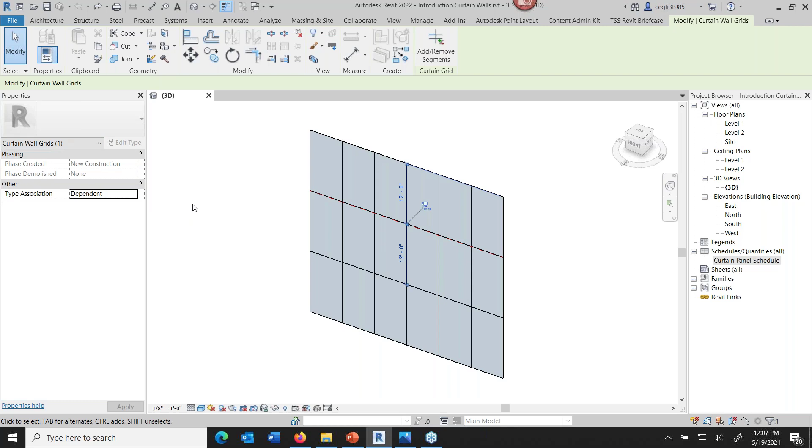If you select on the outside, you can see here that it's a wall, and I'm just using the out-of-the-box exterior glazing here. Another element of it is the grid, so I'm selecting on these dashed lines that show up both horizontally and vertically here. You can see there's no edit type with regard to that, so it's pretty straightforward, but it has its own magical elements, which I'll show you a little bit, even though that seems pretty simple.

I'm just going to hover over the center here and tap the tab key a couple of times, and then left click to select the curtain panel. In this case, out of the box anyway, I used the architectural template to draw this one. You can see here that it's using a glazed panel, but if you go to the drop down, you can pick other panels, or you can pick a wall to drop into this as well.

What I've used before, like on a butt glazed corner condition, where I wasn't getting the join to come the way I liked with these panels, I made a new wall and made it glass and made it the same thickness as the other panels in here, and then replaced the panels that were near along the edge of the corner that came together.

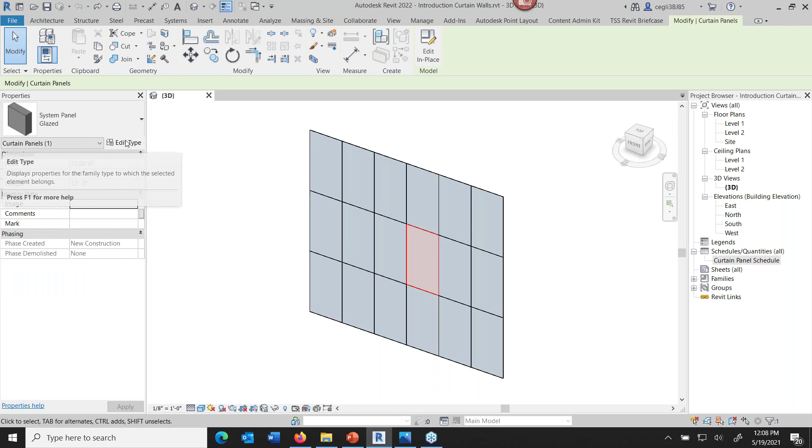Okay, so you're seeing some instance parameters that are associated with the panel here. If you go to edit type on this and drill under the hood, the type parameters revolve around offset, finish material, and then analytical properties associated with the thickness, that kind of thing. If you go to the curtain wall itself, there are quite a few more instance parameters in the property palette off here to the left. I'll just make that a little bit wider for you. And then if I click on edit type,

more controls. So here's a lot of rules going on under the hood as far as the layout and the like. This one's set right now for a fixed distance for the vertical and the horizontal grid. But if you pick inside that cell and look underneath the hood, you could put in a fixed number. This is 6 feet. If I wanted it 4 foot wide, 9 foot wide, or something like that, you could do the fixed number, and it would change the spacing there. Same thing with the horizontal.

I'm going to mostly just deal with analyzing the vertical grid, so we'll keep an eye on that one today because it's the same going the other direction. It's just redundant to do that here. So okay, depending on your design intent, you can decide for yourself where you want that to be.

Now the grids that we're seeing here, you can actually drop in more if you want. The rules said to place it, what was it, 6 by 12 or something like that. But I can come up here and select curtain grid on the architecture panel, and as I move my cursor around, you see how a grid is following my cursor in the horizontal direction. And if I track along one of the horizontal ones, it goes to drop in a vertical grid. So now I've got some more grids added in if I felt like it.

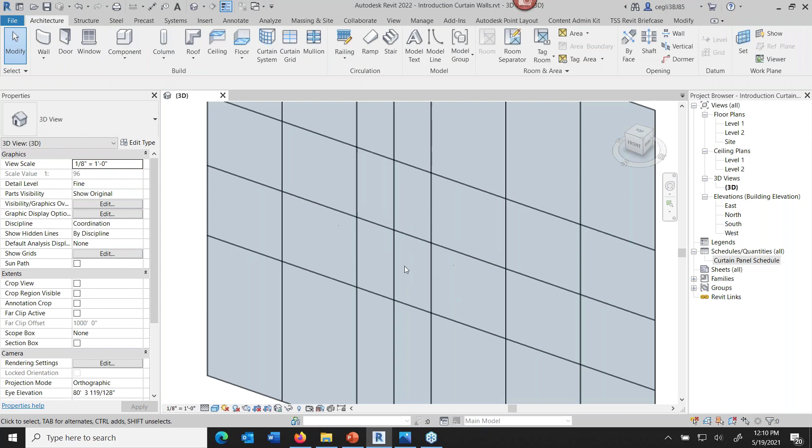Also, you should see that I can pick and move them around too, by the way. I can pick them up and slide them from place to place if I want, like that. One kind of magical thing about the panels is if I tab a few times to select, you can see that it subdivided that original panel when I dropped in the grid. Okay, so let me go ahead and back that up just a little bit here.

Get rid of those. Okay, now with regard to the grids that are in here, if you didn't want one where it landed according to the rules, you can unpin it. So you select it and unpin it, and then from there you can move it as well. So I'm just sliding it up right now, and you can see here, as I showed earlier, the panels have resized to accommodate that.

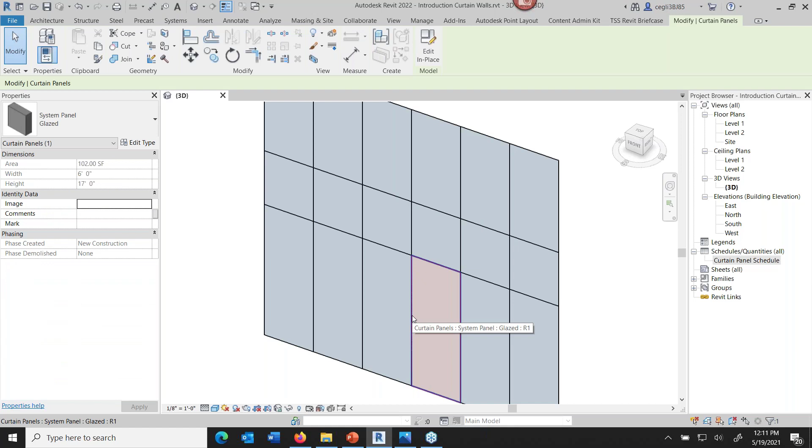Okay, with a zero thickness between panels at this time without the mullion. Now, do be aware that later on, if you say, hey, I think I'll go ahead and pin this where it is, it actually looks back at the rules again, the ones in the curtain wall itself. It looks at a type on the curtain wall, and fixed distance says, oh, here's where I should be.

Right, so then it moves back again. So if you do need to move them around, chances are you're going to leave it unpinned for the life of the project. Okay, so I might have missed it, but I didn't.

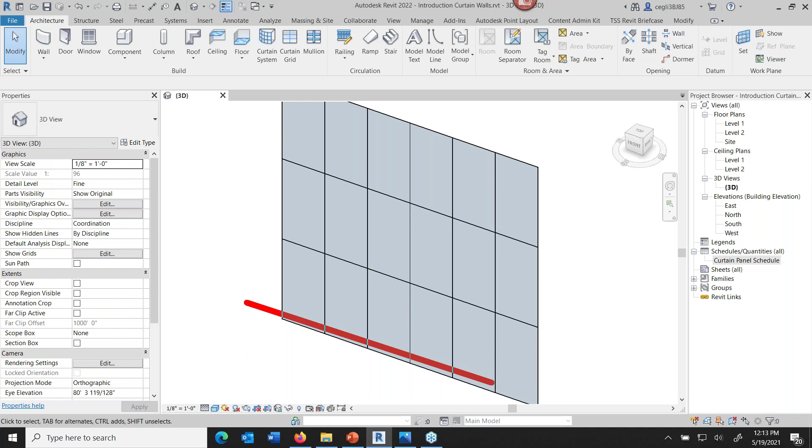Now I drew it from this direction, across this way as I was drawing. So if I expand it with the grips down here a little bit, let me just move it a bit. You can see it's starting to add in panels on that end, not the other end. Same thing here, so the beginning, at least for me, was over here in this corner. So consequently, they'll come back in on top and to the side there, okay? So a couple undos there to move that back again.

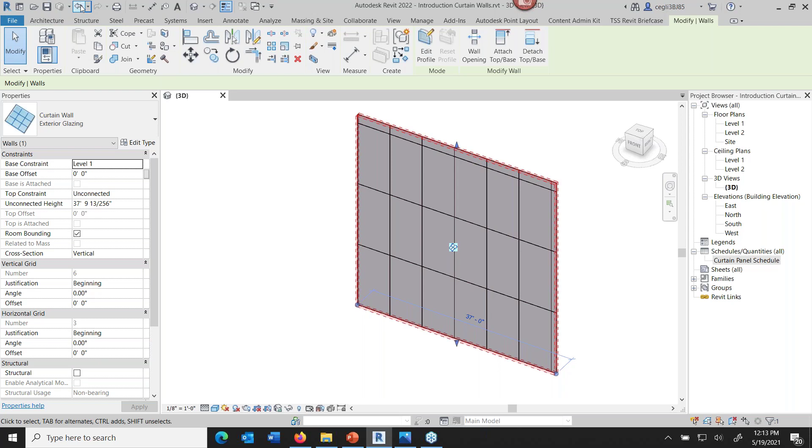Okay, now if you're tracking the dimensions of the panels, I wanted to get into that a little bit, because that's kind of a frustration for me.

And Lana can attest to this. She was chatting with us a little bit earlier this morning about how she did a presentation on Assemble. You all know Lana, she was pretty darn sold on it, so you might want to chat with her a little later on about her experience there, because I can't cover everything here. We could probably do this for easily a day, but we've only got like 45, 50 minutes.

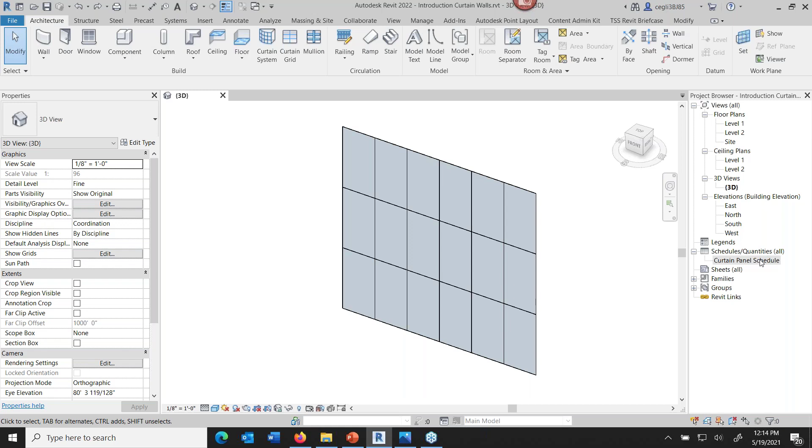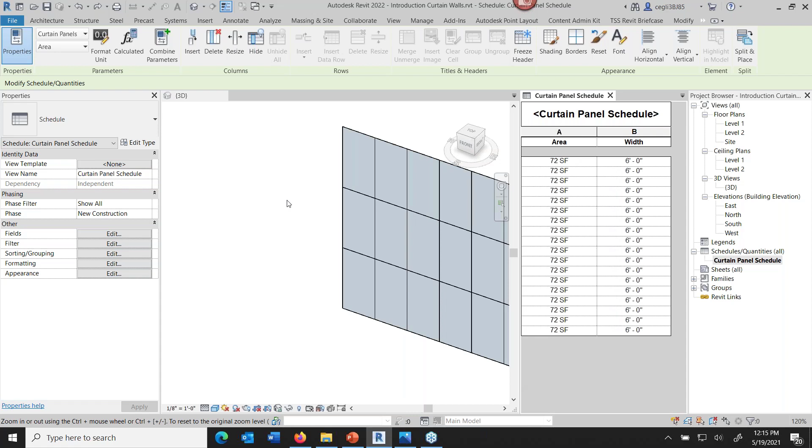So with that, I made a panel schedule here, and let me put them side by side, and then maybe zoom this in a little bit so you can see. So Control plus, by the way, is how you zoom in a schedule. And as I pull that over, you can see right now, if I can get a hold of it here, geez, there we go, you can see right now I have a 36 by 36 wall that I drew.

So all the widths here are 6 feet, 6 feet, because like I said, nothing is being taken up by the grid itself, it's zero thickness, right?

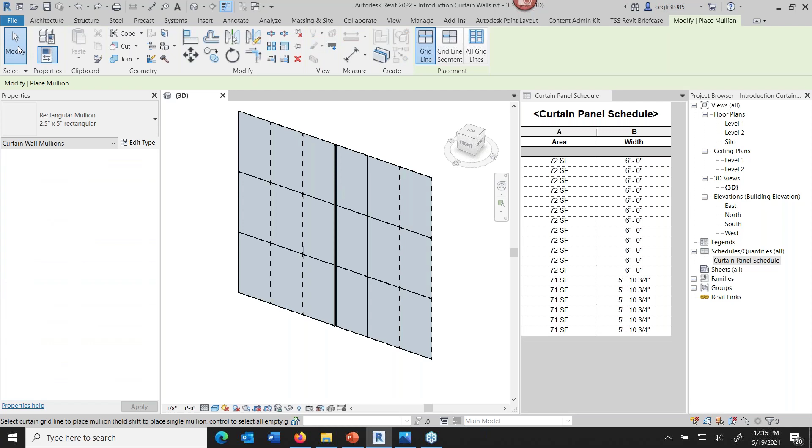So putting in a mullion though, if I hit on mullion and say drop one in right here in the middle, you can see that—well, here actually I should have pointed this out—according to the name anyway, it says that the profile is 2.5 inches and then by 5, right? And so you can see that the panels on either side here, like these guys, if I just pick in the row that'll highlight out there, you can see that it's actually taken away some from the panel itself just to have a mullion in there.

So we're going to have to make some adjustments then if you want to really have 6-foot glazing in there and not a bunch of weird sizes.

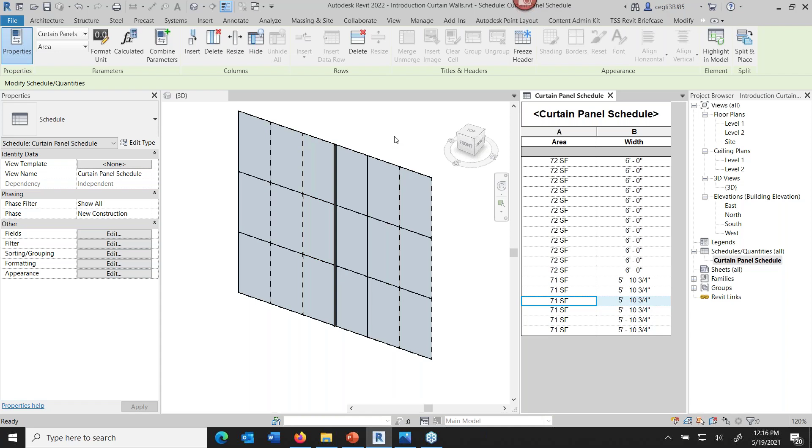There's some things we might have to do. On the wall itself, if I go to edit type, there's an option to adjust for mullion size. I want a fixed distance, 6 foot, adjust for mullion size. I toggle it on and click OK, and nothing happens. Look over here - as far as I'm concerned, maybe I'm missing the boat here or something.

That didn't work worth a hoot. So anyway, maybe there was some other reason for it. Actually, okay, so they actually say 'when possible' it will do that. So I don't know, maybe that's part of what it is.

I might have to change the spacing on this, right? Let's go back to edit type and say spacing. We're 2.5 inches short on this, so 2.5 inches there. I'll just go ahead and place them all on the interior type to use that one, so not worry about the ends right now - that's a whole nother ball of wax. I'm just giving a little extra there, and then I click OK.

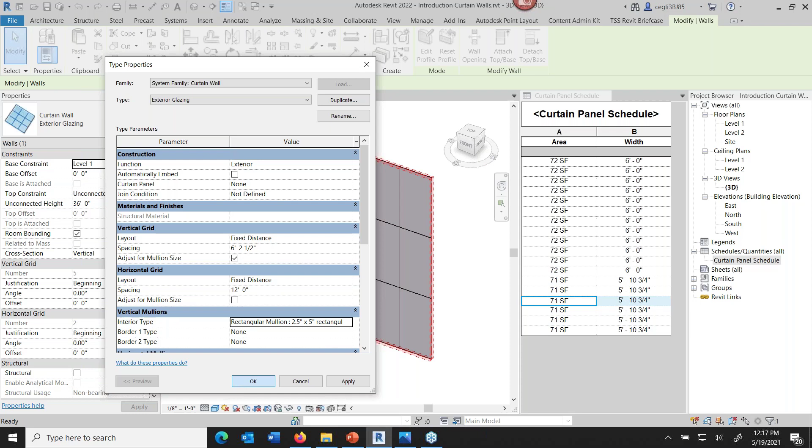You can see here that some of them have gone back to be 6 foot, right? The ones around the middle that we were concerned with, but now on the end I'm short. So a little bit of quick math here, pick on this - I'm actually going to have to extend the wall out, like 37, and I guess that'd be a half inch, about right there.

Ta-da! Indeed, now they're all 6 feet. So if the mullion is going to take up part of your panel width, you got to adjust that, or just plain decide you're going to have narrower panels on it, okay? Now we got that. Let me go ahead and close out of this.

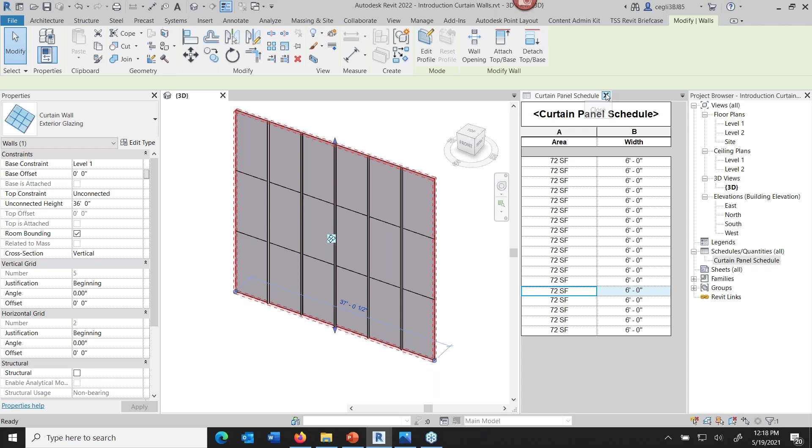What I wanted to do next with this is work on these mullions a little bit and take a closer look at it. Let me see if I can tab through and select one of these. I'm just going to orbit around a little bit here. So here's the one - this is the out-of-the-box from Autodesk one, the 2.5 by 5 inch rectangular mullion. And it is indeed just grabbing everything it can get its hands on for the width of itself, right?

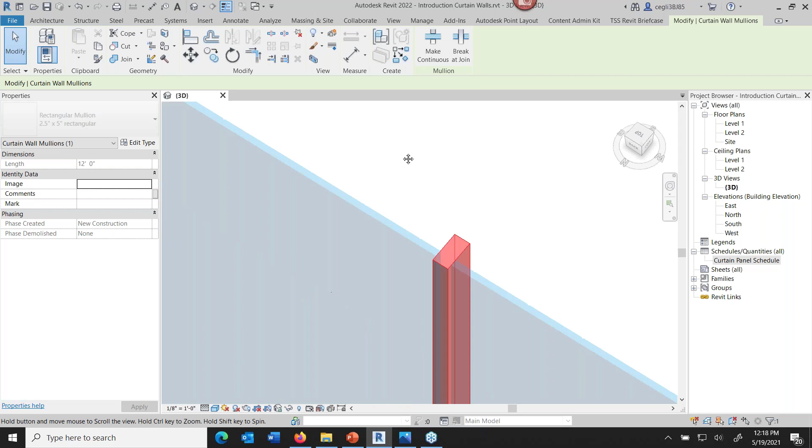But I thought maybe it might be interesting to try this one right here. Let me wait till my screen catches up here a bit. I'd like to get a butt glazed mullion profile working here.

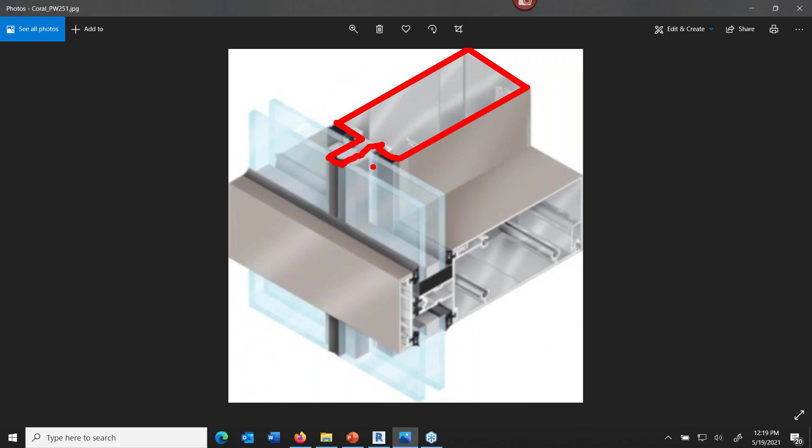Maybe I can sketch over the top of this a little bit. So right up here would be my shape, like that, because there's a profile underneath the hood that drives this. Now I'm getting a little crude with my drawing, but I'm going to want something that looks like this to accomplish this, so that the glazing goes past the mullion edges, and the bulk of the mullion is on the inside of the building. Makes a pretty clean look, which is what this manufacturer is attempting to do, and I'd like to mimic that if I could.

So let's start with - I'm not going to take the time to draw one up, but indeed I've done one for us already. Let me go ahead and call up the profile that I'm going to use here for the next step. So here's what it looks like when you get into the mullion.

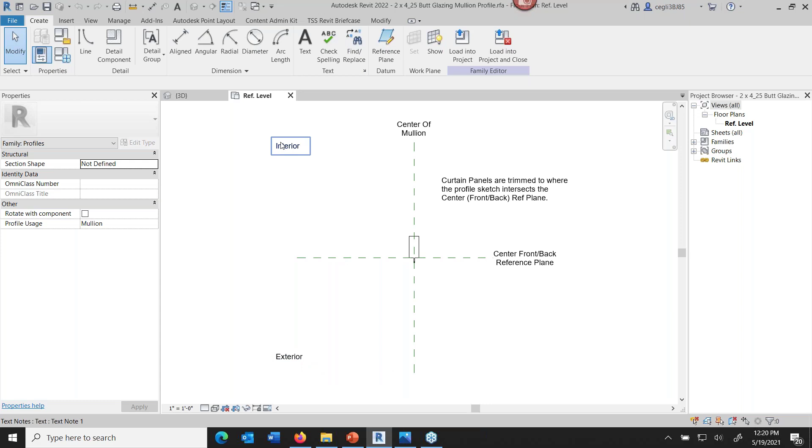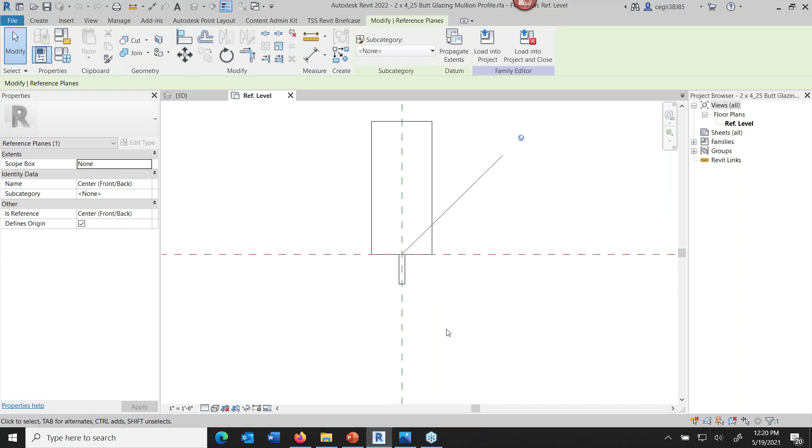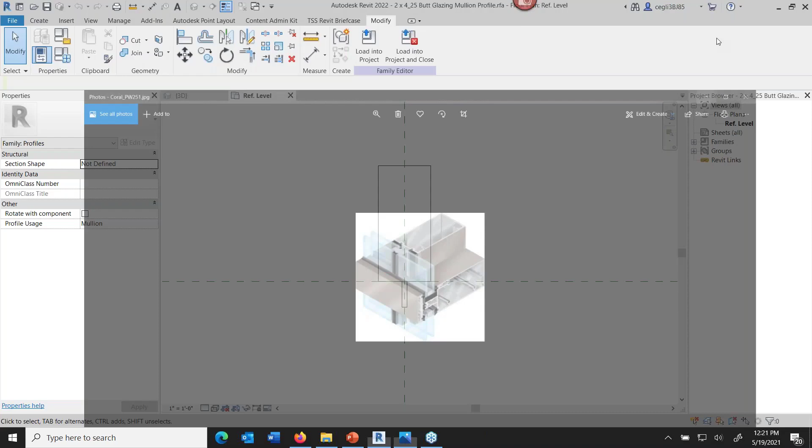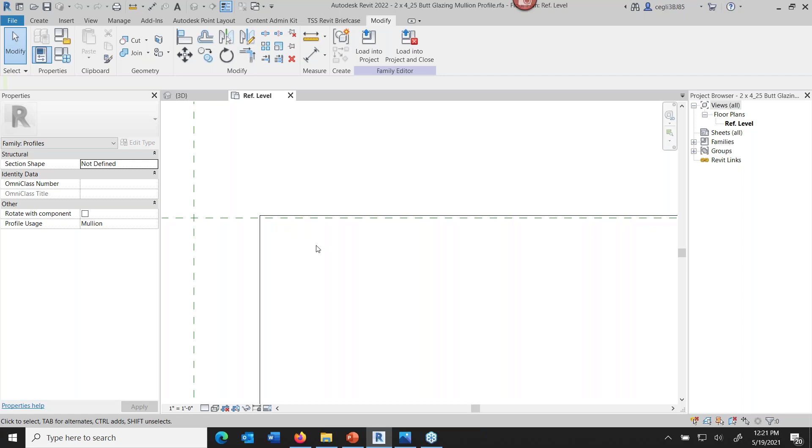So for me to achieve something closer to what we were looking at in this photo, I'm going to have just a little nubbin stick out that, according to the manufacturer, was 3/16 of an inch. So I made the profile lines 3/16 of an inch here. And then here's the part that I had to do - let me get in closer so you can see. I stayed off that green line by the minimum allowed by Revit, which is 1/256 of an inch. I pushed that back in the profile like that, so it didn't intersect it, because if the line comes down here and here, for example, that's how far the glazing will back off.

Okay, so I want to get it in there fairly far. So I'm just going to turn around and load into this project and close it.

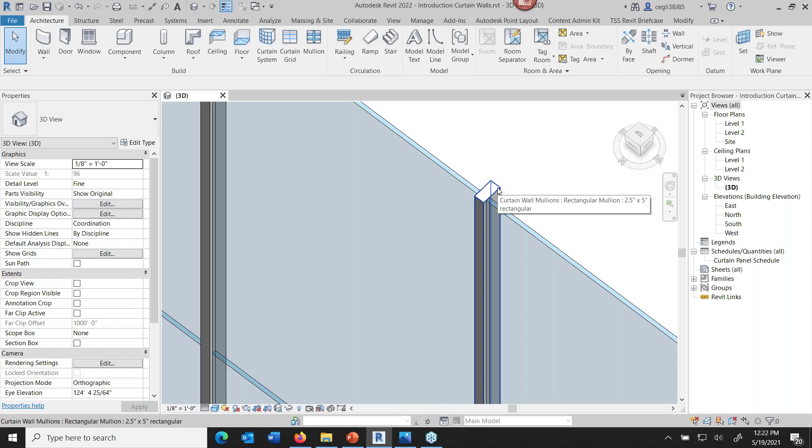Now the mullion itself, if I click on one of these, this is the rectangular mullion, 2.5 rectangle, blah blah blah. I'm going to go to edit type on it, and this will affect all of them I've already put in here. I'm just going to overwrite this one. Normally I'd probably choose one that I'm not using. Well, I'm not going to use this one, so I'll just rename it, and maybe call it glazing mullion, something like that.

And then this part right here is the profile that's being used, which is the default, actually the 2.5 by 5. And here's the one I just loaded in, the 2 by 4.25, blah blah blah, that I made. And I already know I'm going to have to back it off just a little bit.

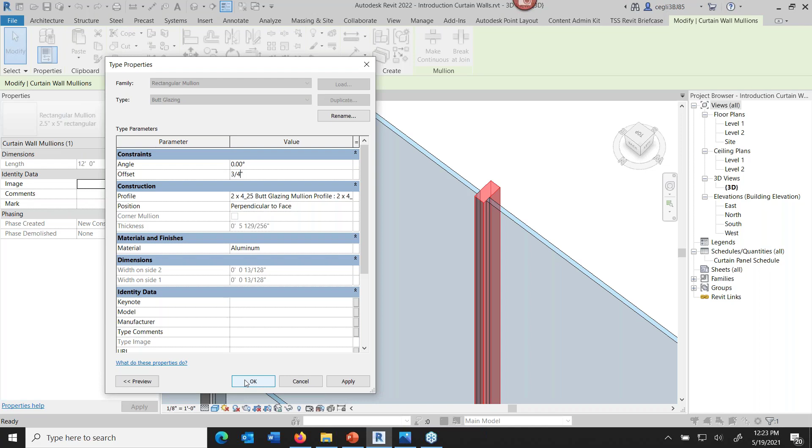You have to adjust how far you want it in either location here. There's a couple places to do that, but I know I'm off by 3/4 of an inch here, so I'm going to push it forward a little bit so it butts up against the glass. I had to tweak around that to figure out what that number was, nothing magical there. Click OK, and it'll go through and substitute all of these. You can see they got substituted out for the new one that, at least I consider, to be improved.

Okay, so that's how we did that. And consequently, the glass, it's not going to be 6 feet now. There's 3/4, or 3/16 of an inch off or something like that now. But you already know, as I showed a little bit earlier, how you can adjust that.

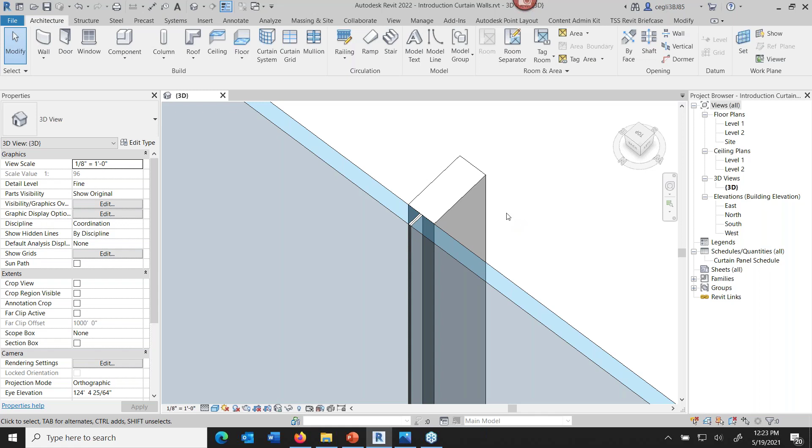With regard to these panels, let's move on to those. These panels we're looking at are glass, right, or glazing anyway, virtual glass. They don't have to be that. As I was saying earlier, I could make this brick if I wanted to, just come up here and say be brick instead, and it'll put brick in there.

But this is another one of these that if you select the wall and hit edit type, you can see that this is a system family. Out of the 3 different family kinds in Revit, which are system families, loadable families, and in-place families, system families are the ones created by Autodesk and contain magic, as I always say, to do something interesting. Drop in a door, the wall opens to receive the door. You slide the door down the wall, and the wall heals itself and opens up in a new location to receive the door, stuff like that.

So there's no edit family button up here on something that's a system family, but it's a play between loadable families and system families. And the profile that we saw a little bit earlier was used there.

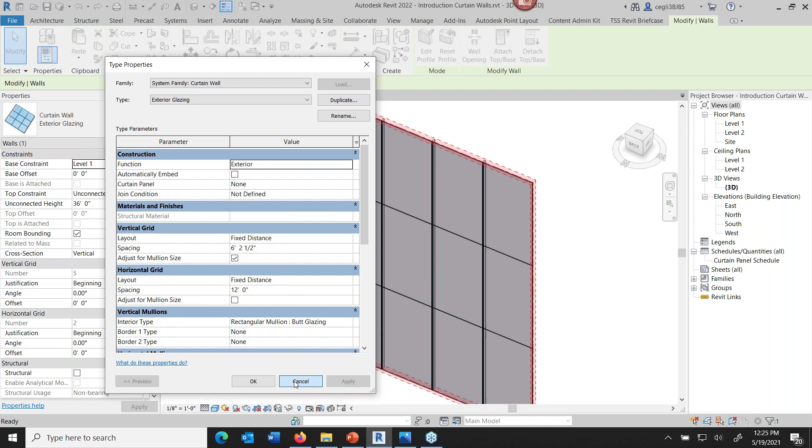We can actually decide what we'd like to be going in for the panels too. So for example, let me open up a sample file that I got from custom—this is from an older Mastering Revit Architecture book, I don't know if they still have these days. The book is called Mastering Revit, 2022 or whatever, probably by now. It was Vandezande, Krygiel, and Read who wrote this one back then, and I thought it was a good example of different kinds of panels that could be in here.

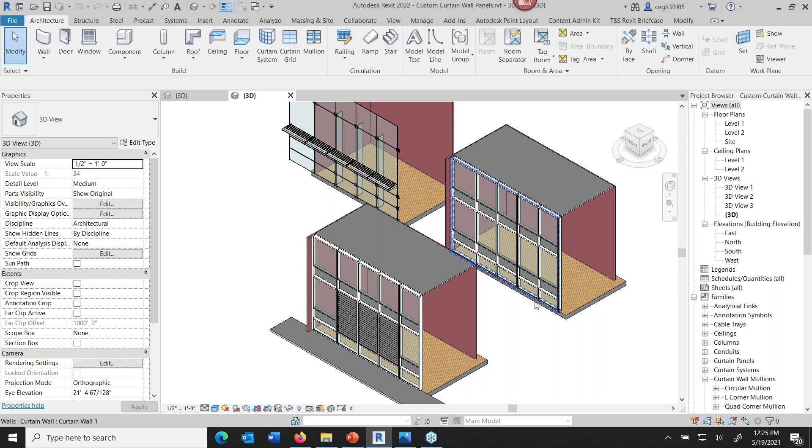Like if I tap to this one—let me see if I can get it—let's see that one. So yeah, here we go, glazed panel with spider is on that one. And then up here, I think this is a different one: yeah, glazed panel with spandrel. So you can swap these out.

What I'm talking about—I won't take the time to open this one up in the family editor, but here, do like that. You can see the edit family button is up here.

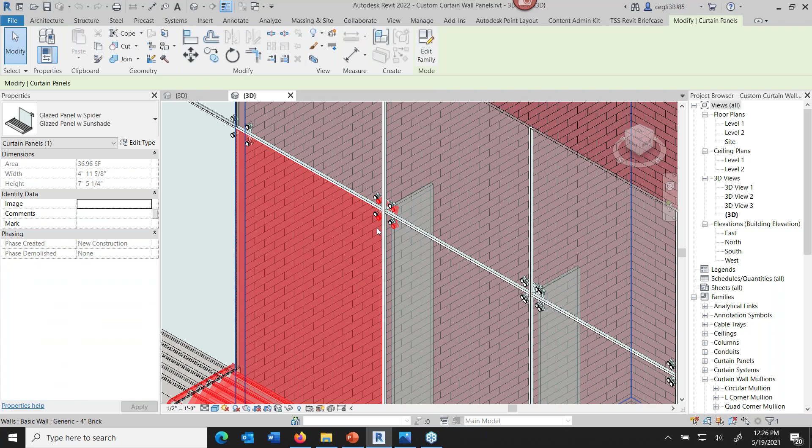In this case, they did a nested family, so they nested the spider in with the other panel here in the family editor. And I wanted to work a little bit with the louvers on this to show you how that would go into play here. So let me go ahead and open up a family that is the louvers.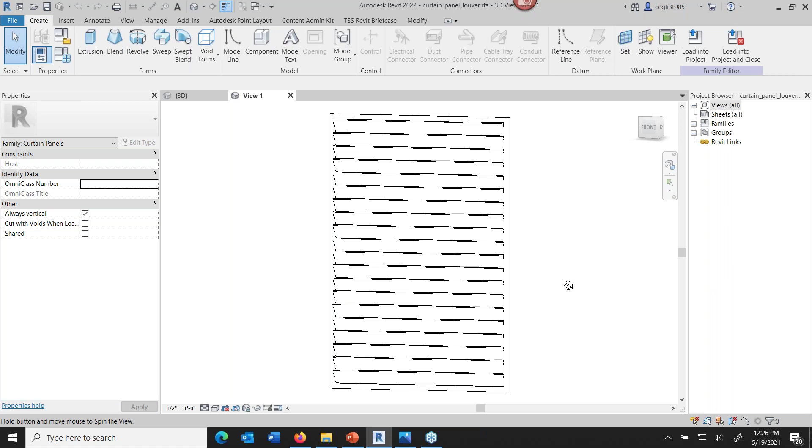By the way, I'm working in Revit 2022, which if you're watching this 3 years from now on YouTube or something, this is our current version that we have right now. Everything I'm doing here so far you could do in 2019 or whatever you want. There's nothing that has changed with regard to this. I'll show you one thing that's new in 2022 that can help you when it comes to curtain walls. So here's a louver family.

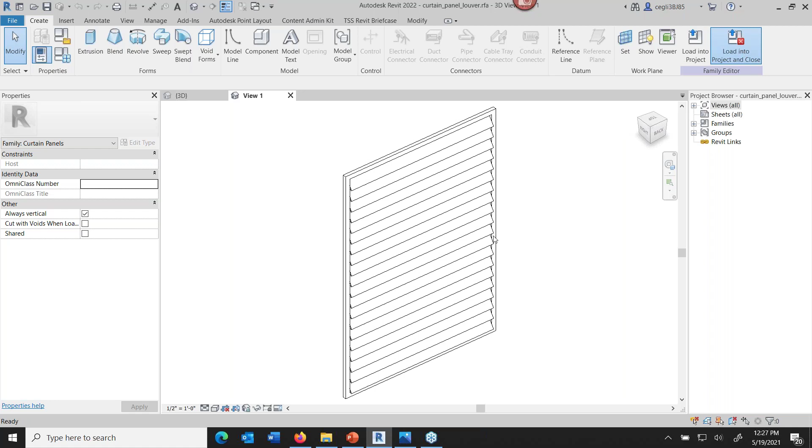I'm going to go ahead and load that one back into my project here and close out of that. So now that one should be available to me. If I select one of the panels, I can swap it out for, in this case, the curtain panel louver that I dropped in. And for that matter, maybe I'll change the number of slats on this down to 16 or something.

So if you have a mechanical level on a high rise, you'd probably go through and swap out all of those panels for louvers if you want to. You've seen that on the side of buildings. You've probably done some yourself that way. Okay. All right, so there's that.

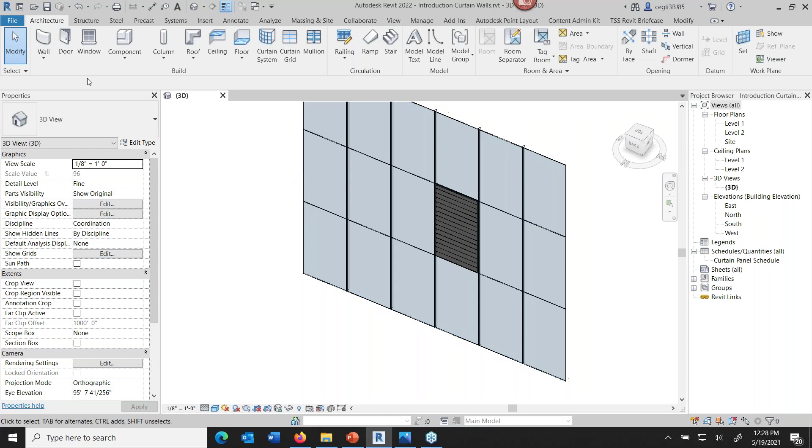Let me try a different set of exercises here. Let me close, and I'm going to open up this one right there. If you're in a position where you need to have a curve, you can see here I've got a curved surface like this that rolls around.

So I go to wall and exterior glazing. I'm going to use the pick lines tool to make this easy on myself here, and go from here to there to there. So here's 3 separate ones that I just created. And maybe I'll go to the 3D view here.

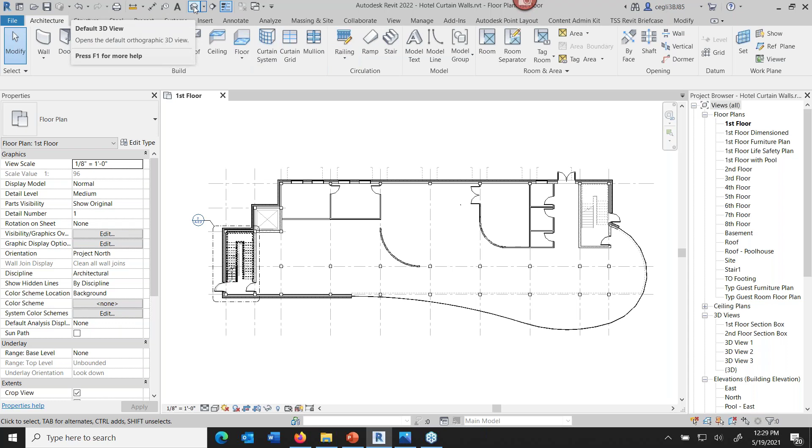Here, I'll just go up to the doghouse up here. It's probably supposed to be a home, but it looks like a doghouse to me anyway. So I'm going up to the doghouse to take a look at what we've drawn.

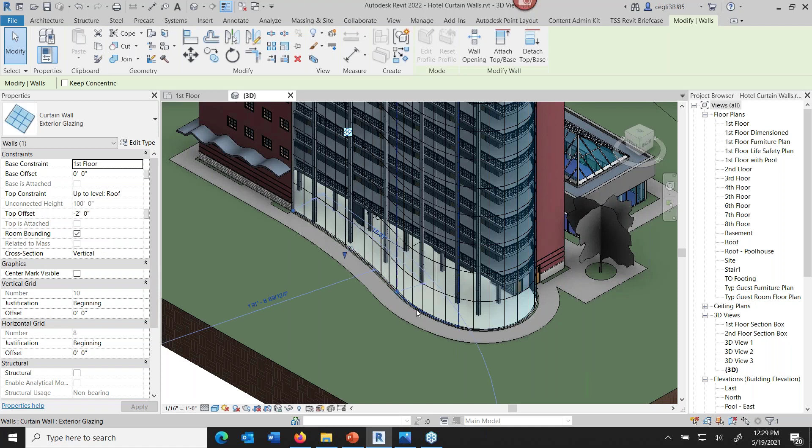So now I've got 3 curtain walls in here because it's 3 separate arcs that I'm working with. And part of the issue with this is, let me select these. Maybe I can isolate them for you. It's kind of hard to know what you're picking with the curtain wall, because they really don't highlight very well when you have them selected. So let me just do an isolate elements here. Okay, so now you can see a little more readily.

This wall here that we were using, if I go to edit type, it looks fairly even because we got a little bit lucky with the arcs here, but in the vertical layout it's set for maximum spacing of 6 feet to make it end very nicely at the end of each one of the arcs. But if I did a fixed distance on this and said okay,

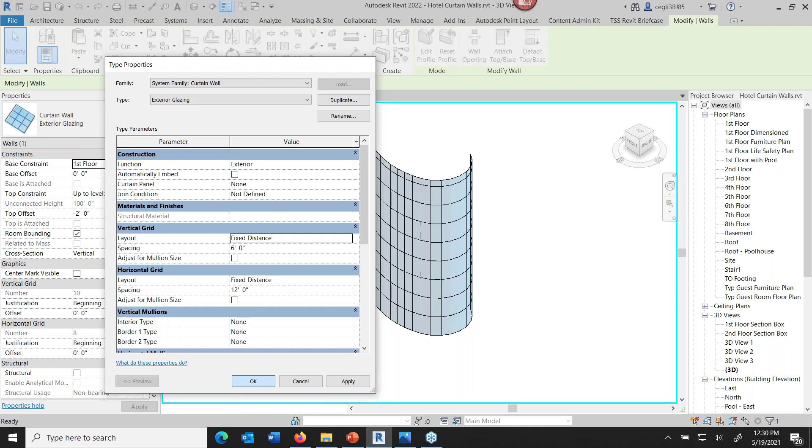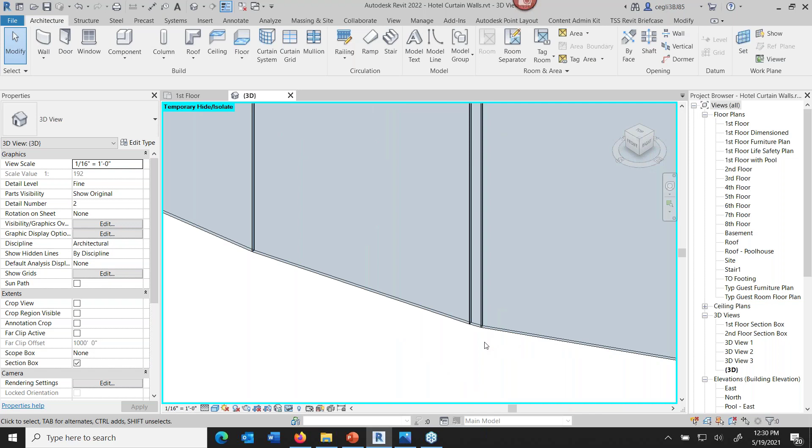it won't look too much different. But if you zoom in to where the 3 come together, like this one and that one, you'll see that actually it gets kind of rude. My math isn't quite right. The length of the arc divided by 6 is not working so hot. Same thing at the next one, and so on. So that in itself was one of the problems, but with some math and a little bit of a change to your design, you can probably overcome that to where you get even spacing.

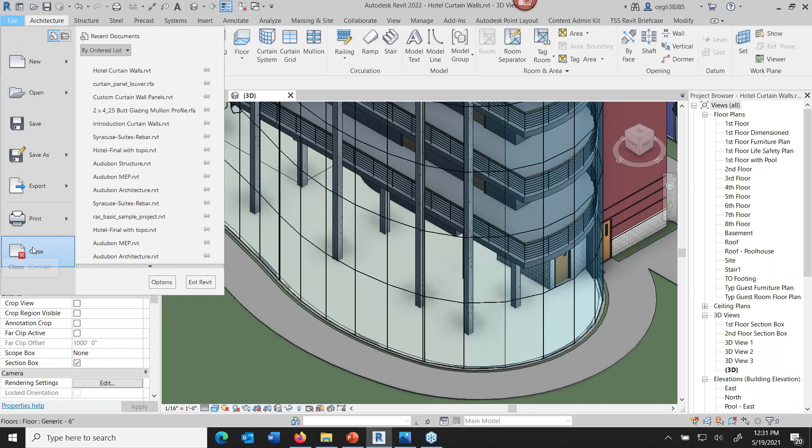I wanted to show you a different approach that we might take with a curtain system that might solve some of that for us. And at the same time, I'm going to work with a tilted wall to get this done. So I'm going to use a surface and then apply a curtain system to it. But actually,

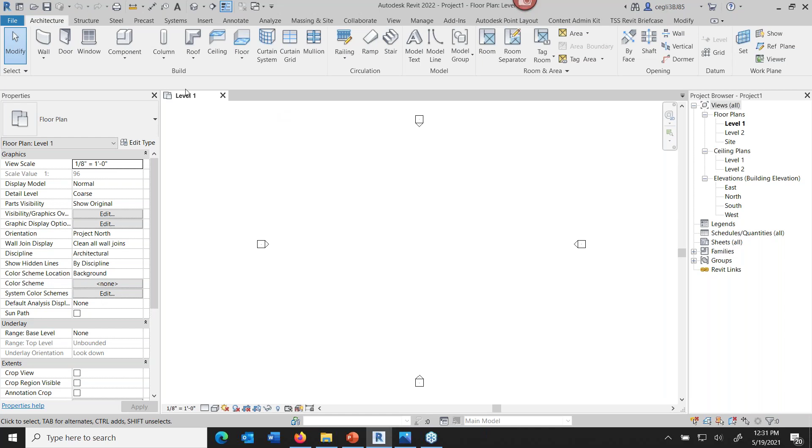I said that there was something new in Revit 2022. As long as your project's in 2022, you would have this capability. I'll just draw maybe an 8-inch generic here so you can see it a little bit easier. Same thing is true. I'll draw a curtain wall too. Here, let me draw another one in here.

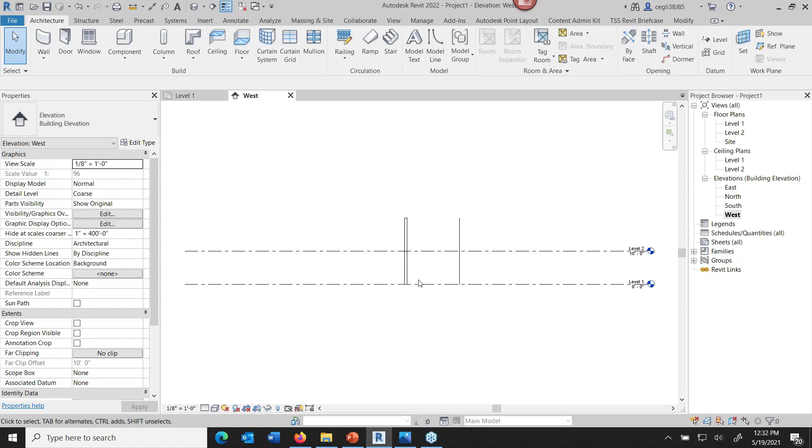If you're fortunate enough to be working in 2022 on your project, then you're going to be able to do this too, right? So here's the curtain wall. It's kind of thin. You can barely see it probably. And there's the little fatter one. Here's what we can do in 2022.

You pick on a wall, and the cross section, I'm over here to the left in the properties palette, the cross section is set for vertical, except now I can taper it if I wanted to. That's not part of this presentation, but you can taper, just so you know, and slant it. That is part of this presentation.

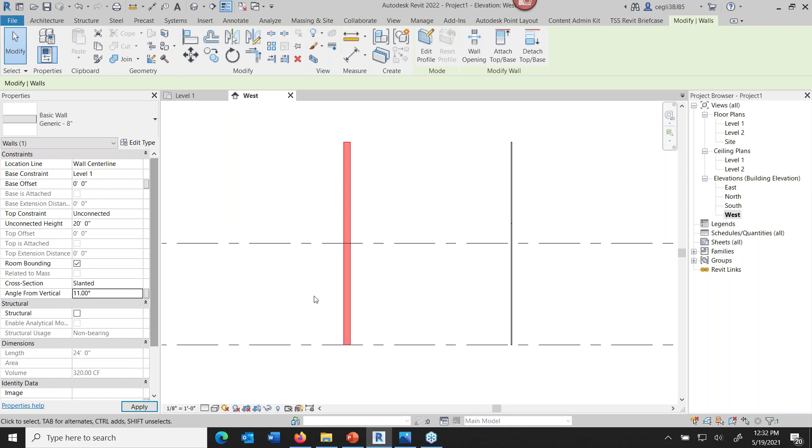I'm going to get it slanted, and then a new instance parameter showed up underneath that one that says, well, Curt, what would you like the angle to be? And I'm going to say 11 degrees. Boom, there it goes. You want it to go the other direction, you put a negative on the front, because it's negative 90 to positive 90 for the tilts.

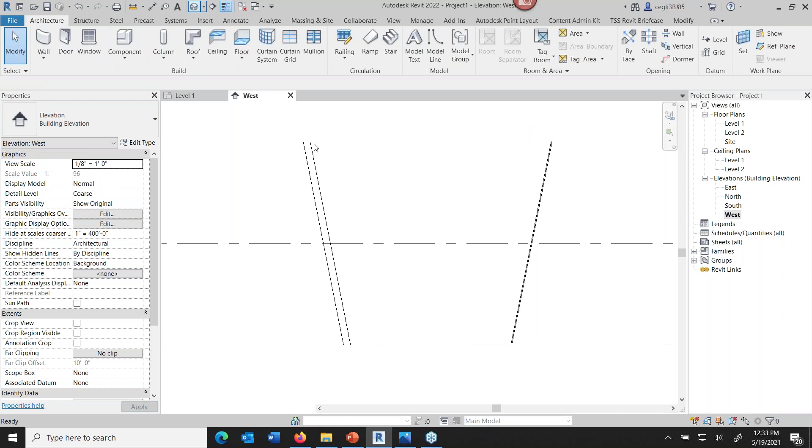Same thing here. But it's a little harder to see because it's 1 pixel wide just about here, right? So I'll slant that one the other direction. So that in itself could just fix some things for you, like say you've got a brick wall that comes up 3 feet, and then from there the restaurant glazing goes backwards a little bit. You might be able to just do it here and not have to do this next step, but I'm going to do it.

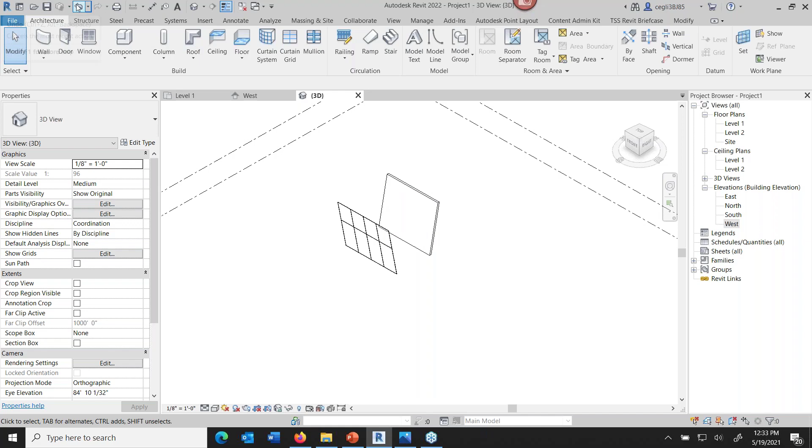Because here's the deal. Say I hit a couple undos here, I'm going to get this back. Say if you haven't figured this out already, hey Curt, why don't you just rotate this? Well, here's the rotate from here to there. No, okay, it doesn't work. That's the deal. So let's try this then.

I'm going to go to a different model, and we'll do this getting a curtain system onto a surface here. So that same hotel or one similar to it without a surface. I'll open that one up here. This is the file I sometimes use when I'm teaching Revit Architecture Essentials from Ascent.

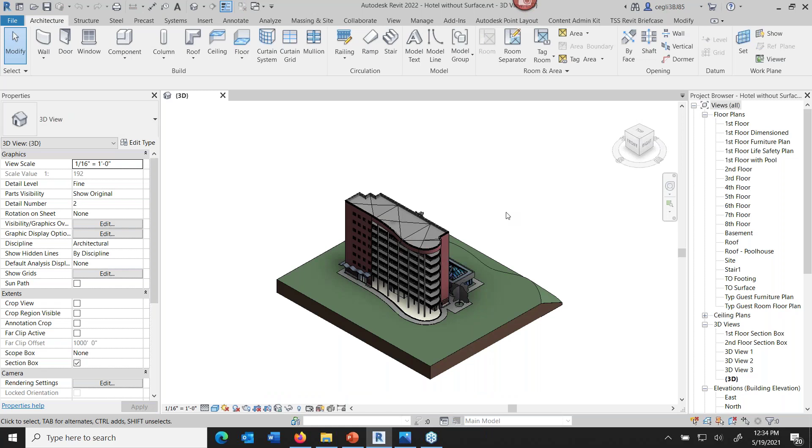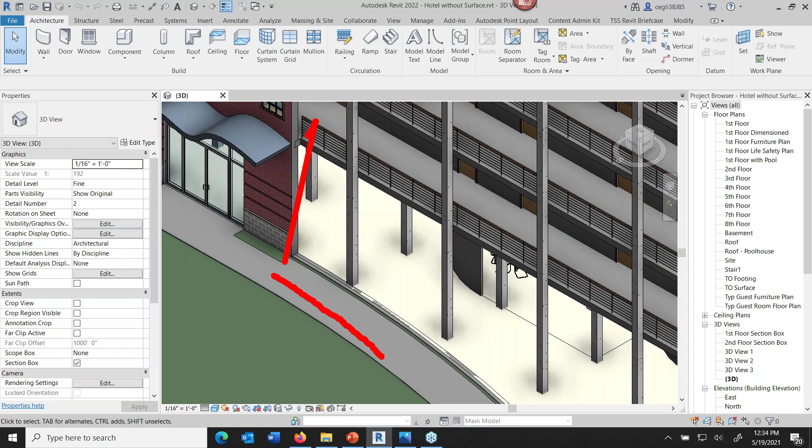And you can see here, this is the one I did earlier, but I had the curtain wall be totally vertical, so it was right up here next to the column, at the end of that wall. This time I'm going to start it out here a little farther and then back it up. So as I go up, it'll actually be sloping, which is going to create a bunch of trapezoids out of my glazing panels, because it'll be a shorter distance at the top. Let's give it a try.

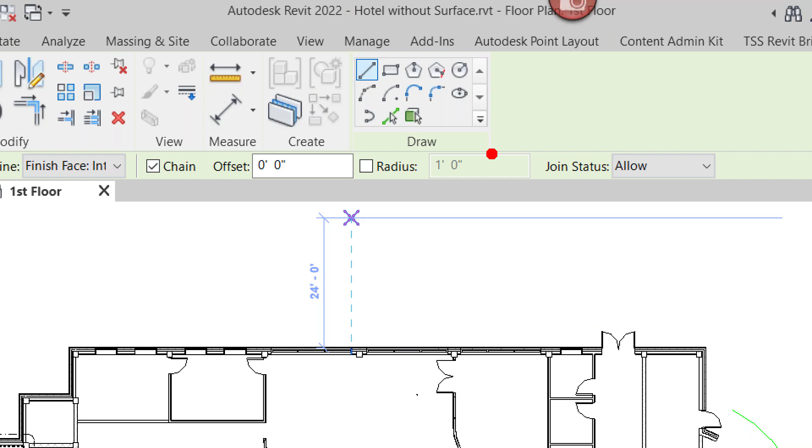Okay, let's go to the first floor plan view first here. I drew some model lines out here so that it didn't take me forever to futz around with this thing. But if you issue the wall command that we've been working with, glazing or whatever, and take a look up here at the tools, there are arcs there, several different kinds of arcs, and ellipse, but no spline.

And that's part of the issue here, because with this particular configuration we're going from convex to concave. So now we have to have 2 arcs to get that done, which means there's 2 ends to the wall. So your end conditions become butted. Like if I go wall, let me zoom a little bit closer here, exterior glazing.

If you go to edit type, for vertical and horizontal mullions, if you're putting those in automatically off of the type properties of the curtain wall itself, then the end conditions, the border types, it'll put one in for that one, and then for the next one over, it'll put one in for it, and you've got double, right?

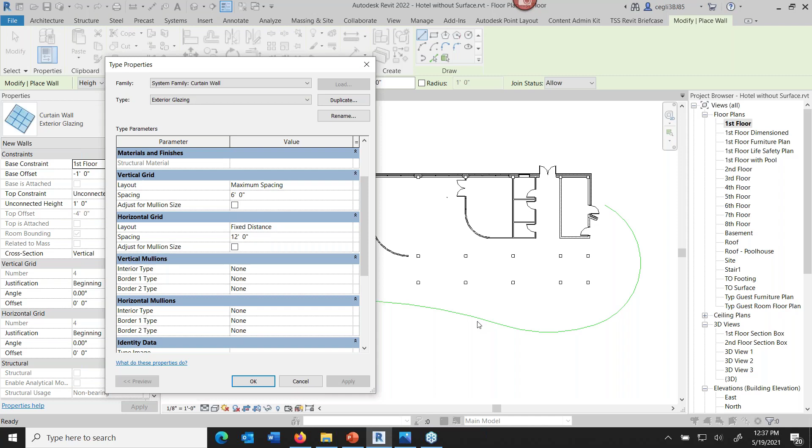And so you can delete one of them, but then the glazing, the panel will expand out, and so then you got a size difference and stuff. Okay, just so on and so forth.

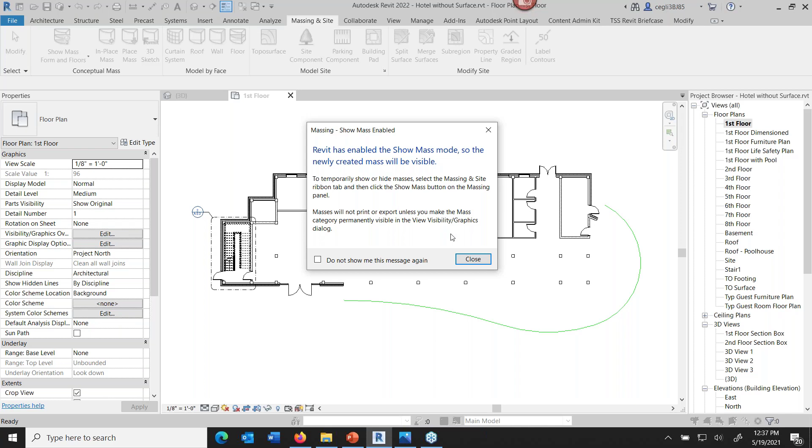So we'll try something just a little bit different here, and that is to create an in-place mass. So I'm over here under the massing and site tab, and I'm going to say create an in-place mass. Okay, it says, hey, Curt, I'm here for you. So we're going to show mass mode so that your stuff will be visible. Thank you. Okay, so I hit close on that, and then I can give it a name.

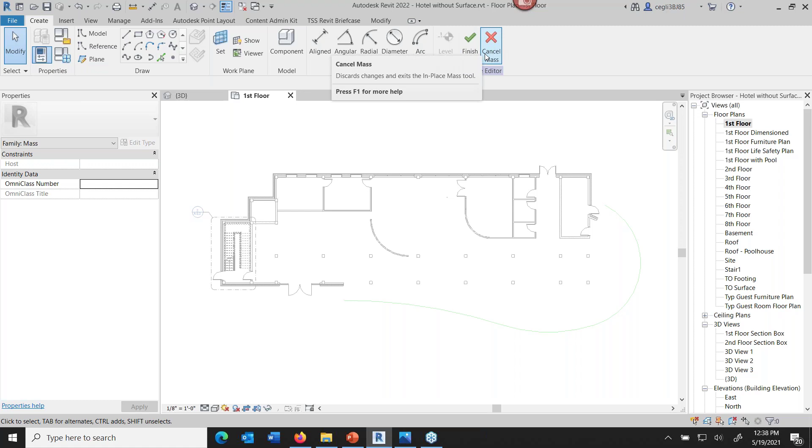So maybe I'll say sloped curtain system here. Sloped curtain system, or you just leave it mass 1 if you want to. Okay, we're in the mode. Okay, now there's a green check mark, red X up at the top. You guys have all seen this before. They want you to not get distracted and finish what you're working on here. You can answer the phone, you can have coffee, but you can't go around placing beams and columns until you get this done or cancel out of it.

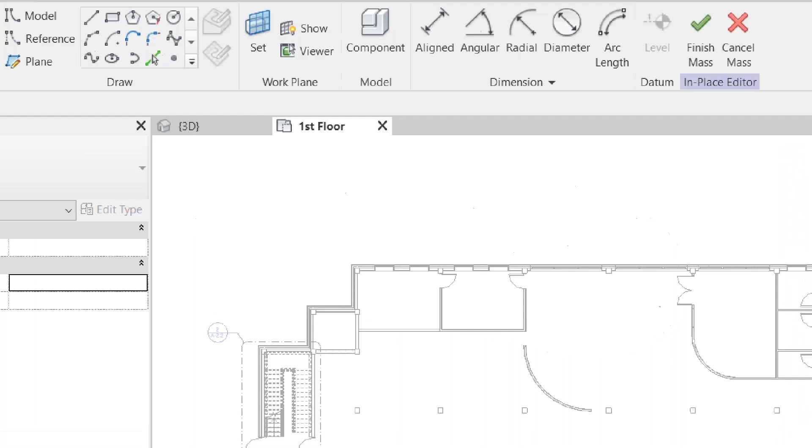So, if you look at the tools up here, let me zoom in a little closer here for you. Look up at the tools here. We got our arcs and pick lines and line and stuff, but there's 2 different kinds of splines up here too. And I'm going to be using this one right here in this case, just because I like the control of it. It's a spline through points. And also take note of the placement plane. I'm actually in the first floor, so it's going to put it on first floor, but you could do the top of it from the first floor if you felt like it.

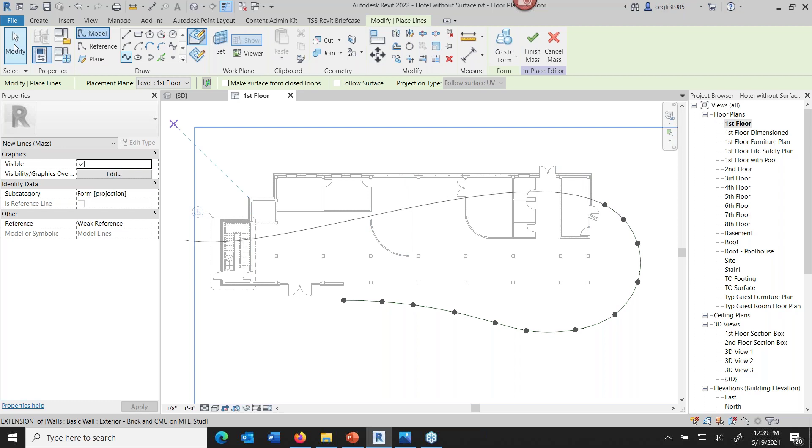So I'll just kind of snake along here. You can see it's making a spline shape coming off of here. It doesn't really matter about those arcs that I put out there, whether I hit the ends of them or not. There's nothing magical about the number of points I'm putting in. I just thought maybe if I put in 15 or 16 or something like that, it might make a kind of smooth control on it. And then finally, I'll hit modify to get out of it. Now I got the bottom done, right? But I got to do the top next.

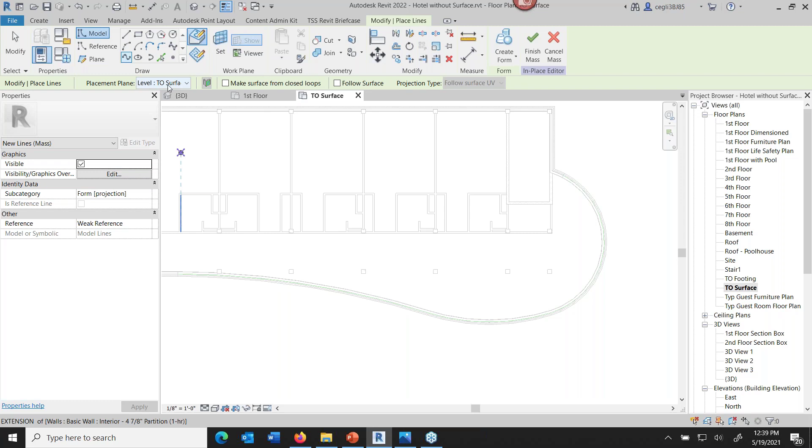So I'm going to go up to a different level where I have another little green line out here. You can see it here to guide myself along, but I'll just clumsily make my way along the same way here. And you can see here the placement plane, because I opened up that floor plan view, it says level top of surface. So let me at least get it on the end of it here. Okay, there we go. I won't be too picky about this just for time constraints.

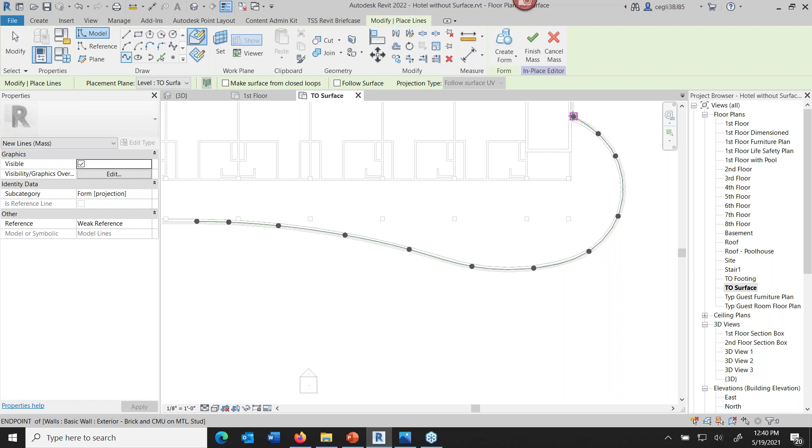But if this were my real baby that I was building, that I want to be proud of, hey kids, look, I did that, as we drive past the building later. You guys have all done that, like that.

And then hit modify to end that one too. Now you can hardly see them at this point, but hopefully they're in there, right? So let's go back to the 3D view here. There it is right there. Okay, now we're not done, but there's the spline that I laid in 3D. I guess I should wait a second till your screens catch up a little bit here.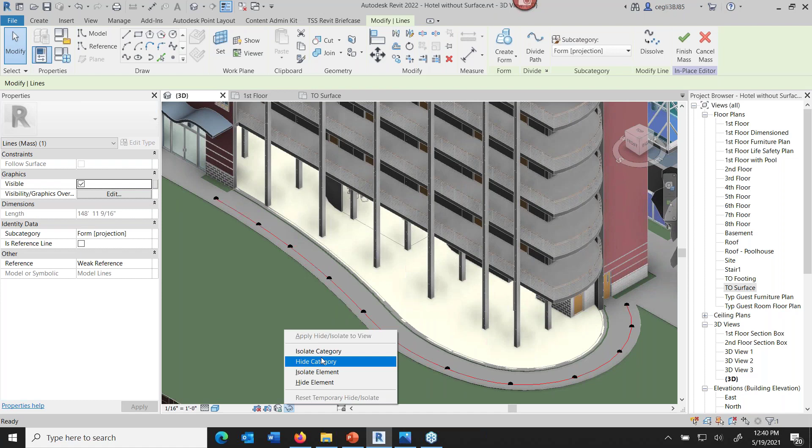I'm going to go ahead and select on it so you can see a little bit easier here, and use, once again, the temporary hide isolate. I'm going to do isolate category here so you can see there's the other one up here too. Okay, and I'm going to select both of them and create form, create a solid form. Okay. So that's basically step number 1 to do this.

And now we have that form showing up there that Revit told me about earlier, that we're going to go ahead and make this visible for you, and you can kind of orbit around here and see what it looks like.

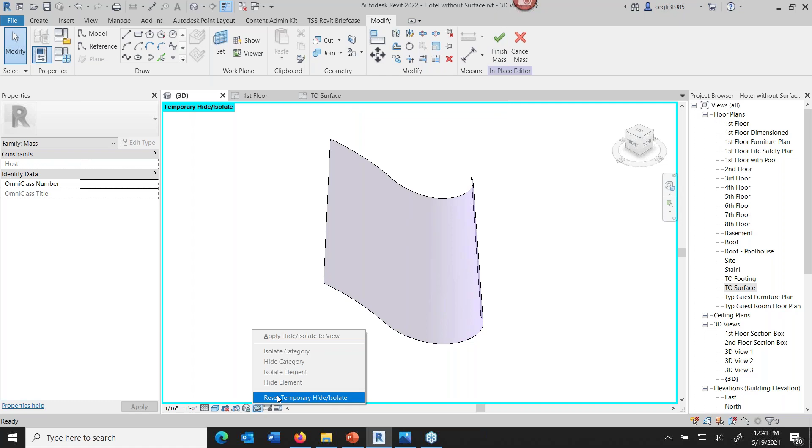And then finally the green check mark, or maybe I'll take the reset temporary hide/isolate off, and then finish. Okay, and it warns me, it says that the mass contains only mesh geometry, so you can't compute stuff off of it like surface area and volume, at least not right now. But you can see it kind of highlighted in a reddish there a little bit. Maybe if I go to hidden and select it again, you can see more readily where it is.

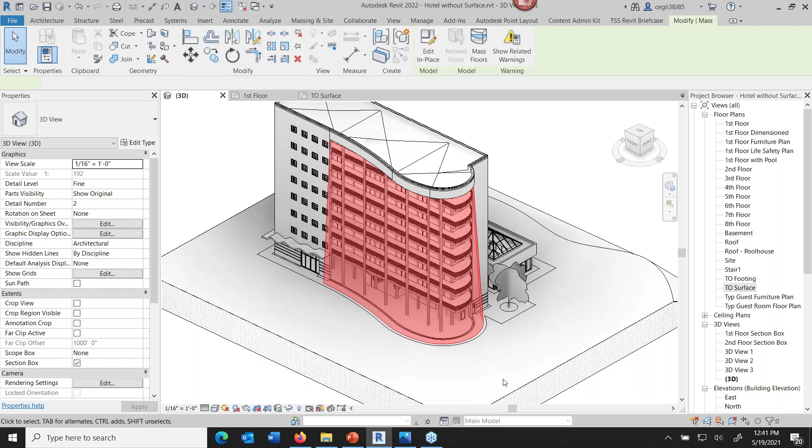Okay, so it's sloped, right? It's not much of a slope, but you can see that it slopes back and it gets kicked out at the bottom. And then the other point of what I was doing here was that it also used a spline, so there's only one end to it, well, two ends to it, right? A beginning and an end, as opposed to three separate arcs strung together. Okay, so

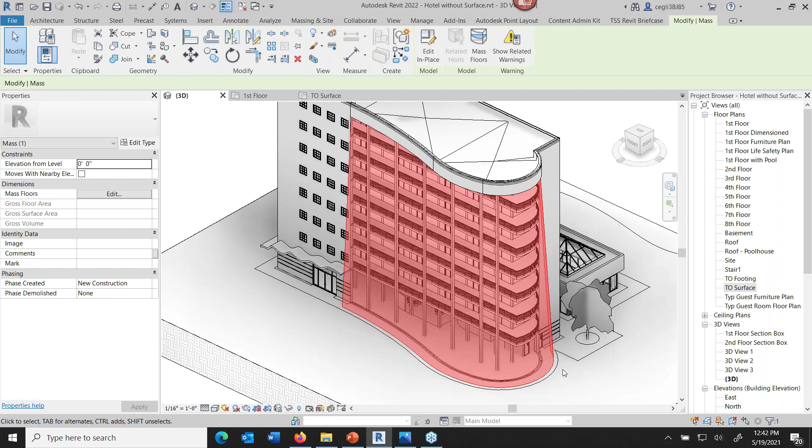applying a curtain system, that would be the next thing that I'm going to do. I'm going to go to the Architecture tab and Curtain System. That's one of the choices there. Go Curtain System. And then I'm checking 3.5 foot by 7 foot 2. That looks pretty good. I think I'll go with that one. And I'm going to select that surface, and then I'm going to come up here and say create the system off of it.

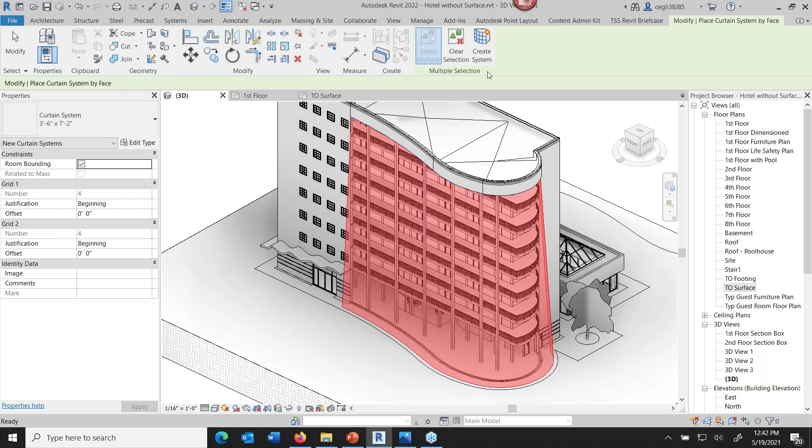And the donut spins for a moment. And there you go. We got the grid across the whole thing there. And then I'll hit the modify button so it doesn't create anymore. They were assuming you're going to go around your building surface after surface doing this, so it leaves you in the command here. Okay, now I'll come back to mullions one more time here before I finish my presentation.

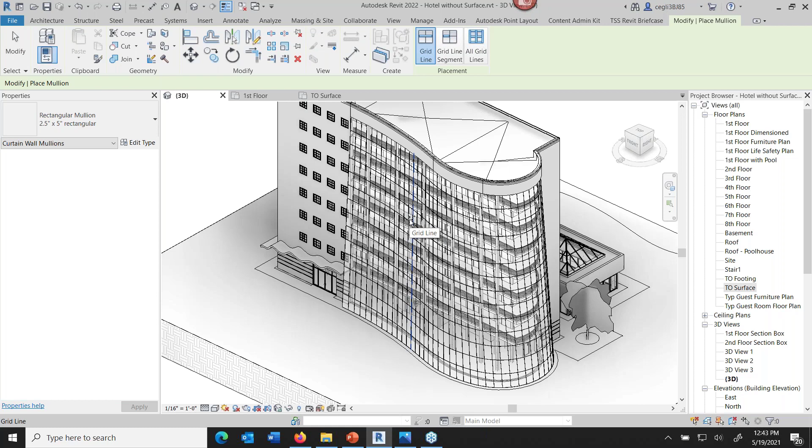If I go to mullion, before I had just added them one grid line at a time. Or you can just say all grid lines, which is a beautiful thing. And you can see here that one single click is going to go across the whole shooting match here. So click, and the donut spins. And wait for it, wait for it. That's a lot of mullions, though, right?

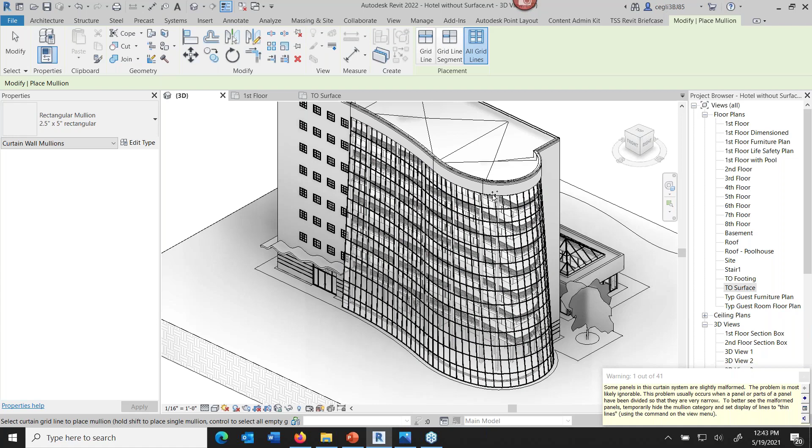Now it's saying down here that some of those curtain panels are slightly malformed. Like I said, we're making little trapezoids here, right? We got some weird stuff going on with trying to throw two of these things, the curves plus the slope, into this thing at once here. But this is just a low-level warning. It's let me through on this.

So, bit of a whirlwind tour, right? We went through the basic anatomy and then how some of these can be controlled. I had a special request prior to putting together the presentation to take a look at how to get a better handle on the widths of your panels. That was that whole thing with the schedule that said 6 foot, 6 foot, 6 foot. And then a little bit on the mullions as far as how to control where the glazing or the panel will stop. And I showed you a little of that.

And then we looked at the tilting of a wall, in this case a curtain wall, and then a different way you could do it, even if you were in 2021 or before, using a surface and then applying a curtain system to it. So